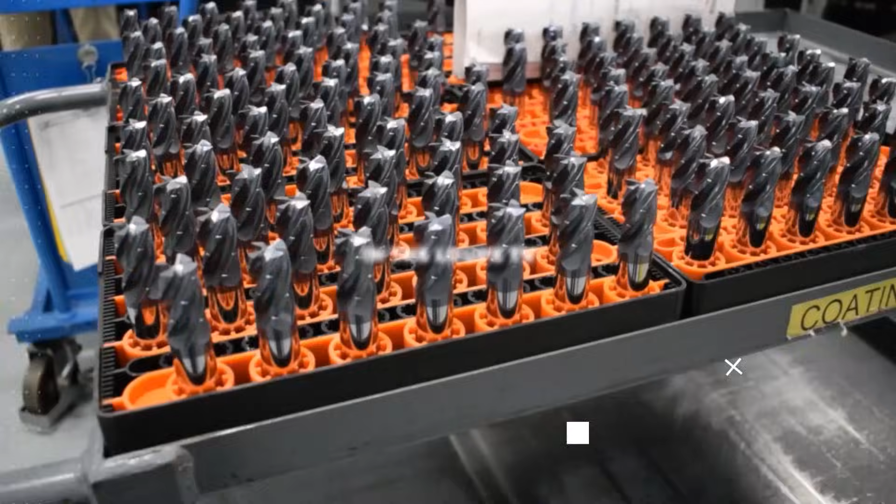Well, hey folks, we're talking about miniature cutting tools, small cutting tools. I mean, we should know, we're Harvey Performance. We make some of the smallest cutting tools in the industry. Actually, end mills down to 1 thou in diameter, plus or minus a thou on the tolerance, so if nothing showed up, you got what you ordered. That could go either way. I'm kidding. But that's how small these end mills and these drills are.

So when you start getting into miniature cutting tools, things are changing. The way we apply these tools is changing. The philosophy that we want to use in our application changes. That's what we want to talk about on this episode. We want to give some tips, we want to give some tricks, and we want to make sure you understand how to take that tool and use it without breaking it.

So you might think, what is a miniature cutting tool? Where does it start? Well, that varies. That's in the eye of the beholder, or the eye of the machinist, right? I personally look at anything that's under 1/8 of an inch, 100 thou, right around there, that's smaller, going all the way down to 1 thou in diameter as a miniature cutting tool. And this is where we need to start taking a look at this and machining it a little bit differently.

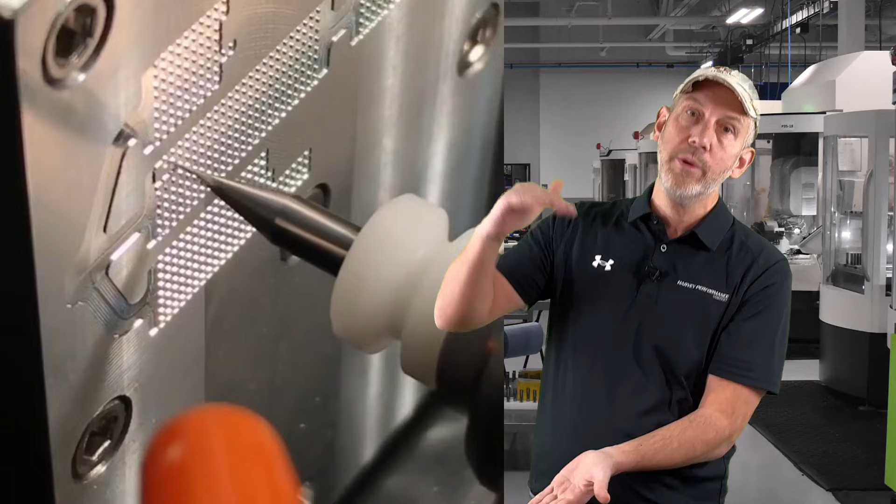Okay, folks, let's cut right away to get started with this. When you use a miniature end mill, or a miniature drill, or a miniature reamer, our main objective is what? The main objective is to get that tool not to break, right? Because we're going to waste a lot of tools to get to the point of when that tool fails. If we can get the tool to sustain right out of the gate, get it not to break, we can always come up with speeds and feeds. But our main objective is to get that tool not to break.

And so that's what this whole training is going to be on a little bit, is to understand why that tool breaks, why that tool fails, what are some of the things that are going to cause that thing to fail, and how do we combat that and fix that? So let's dive right into some of the things that cause these tools to break, and how do we fix them, and where should we start?

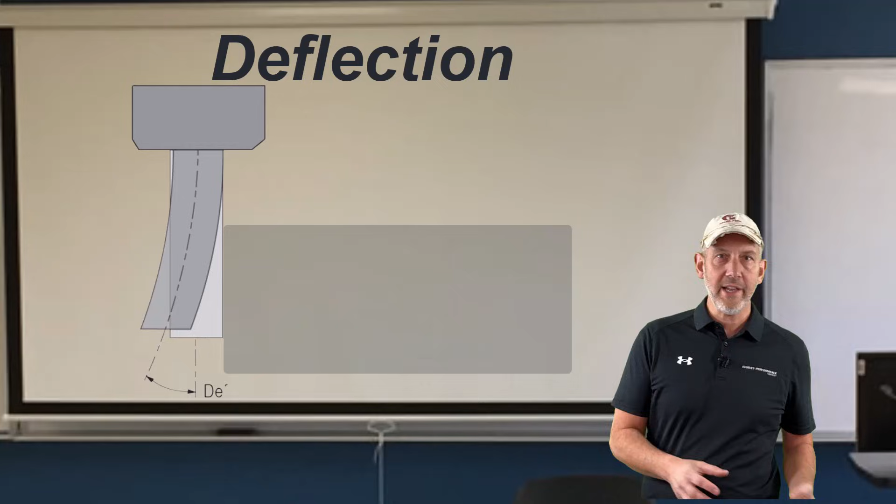Let's do it. So the number one problem with all cutting tools, the number one problem, and I'll say this over and over, is deflection. When a tool deflects, it vibrates, and carbide's very brittle, right? That's where we are going to break a tool. So deflection is the number one killer.

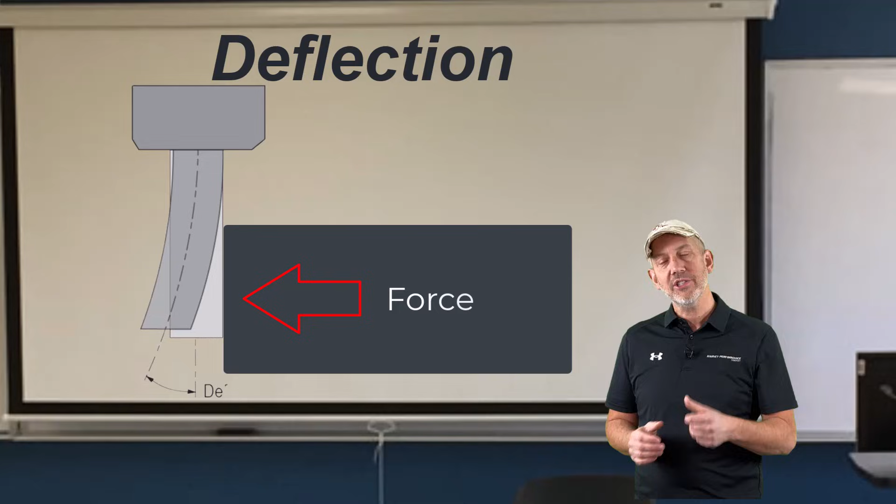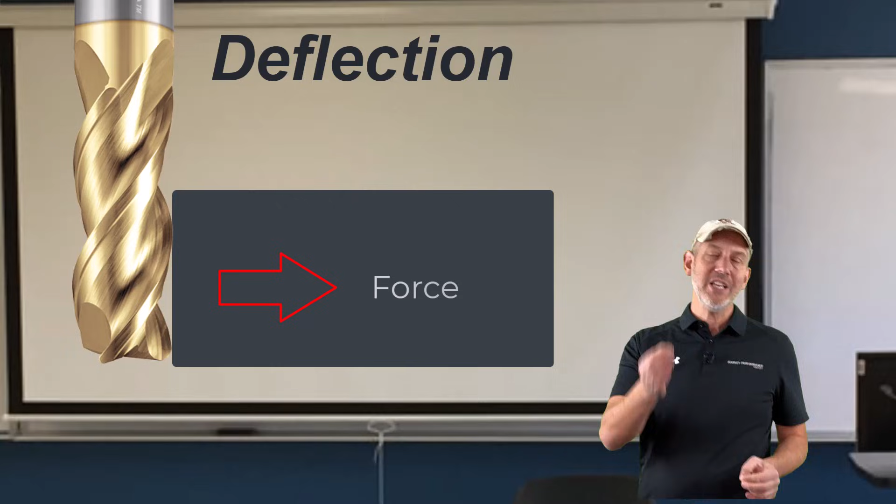So let's just talk about deflection really quick. Now, deflection doesn't mean as much on a 1/2 inch, 3/4 inch, 1 inch diameter tool. But again, we are talking about miniature cutting tools. So if we're getting down to miniature cutting tools, deflection is going to kill us. And there's something I want you to take away from this that's very important.

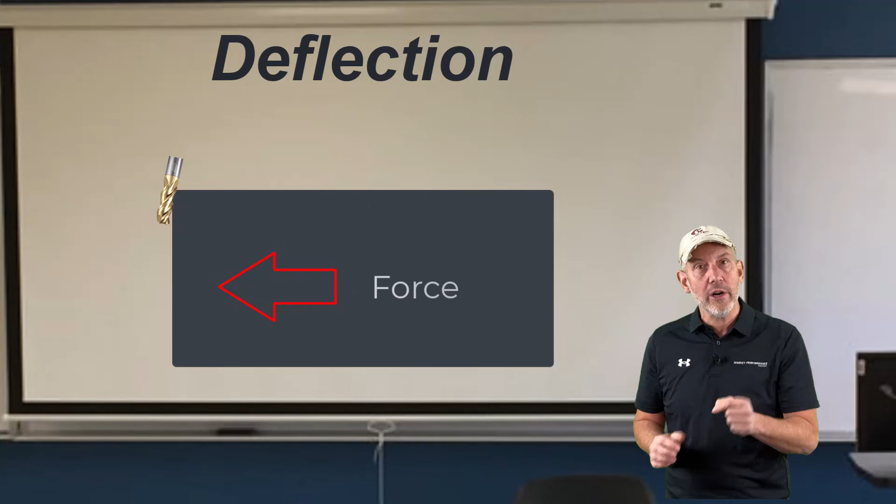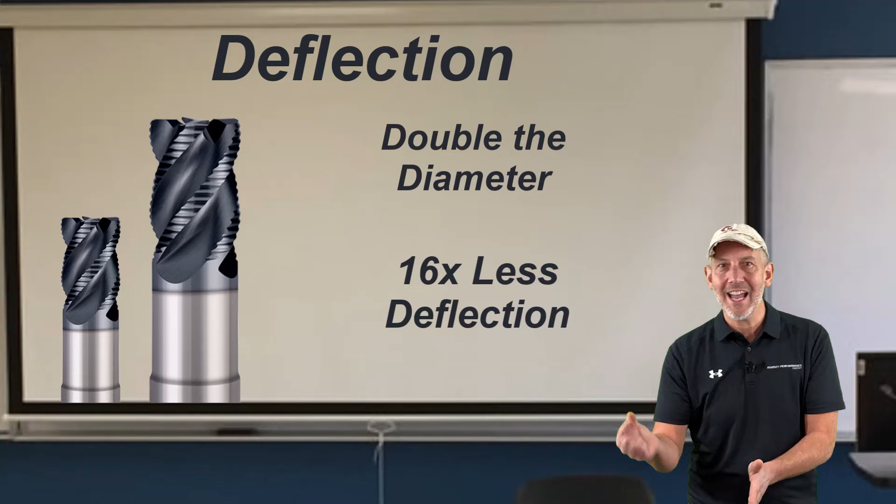If you just double the diameter of your cutting tool, it will result in 16 times less deflection. Think about that - double the diameter, 16 times less deflection. So if I go from a 0.0625 to a 0.125, I get 16 times less deflection on that cutting tool.

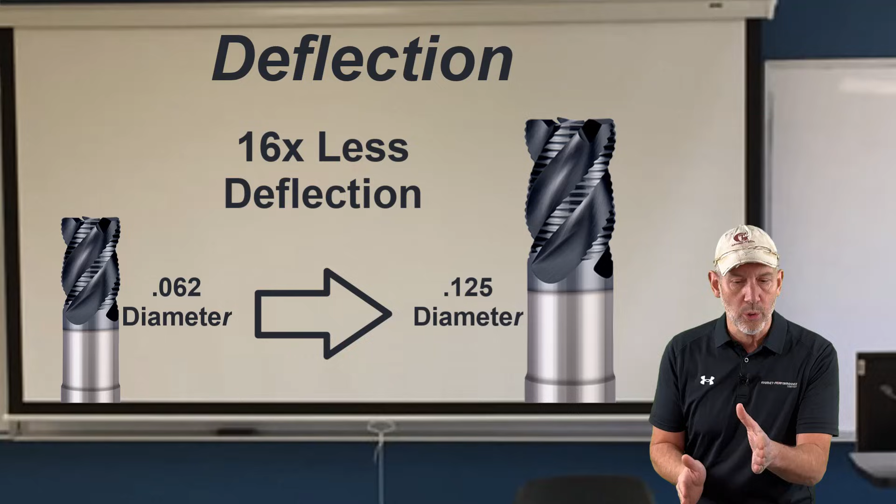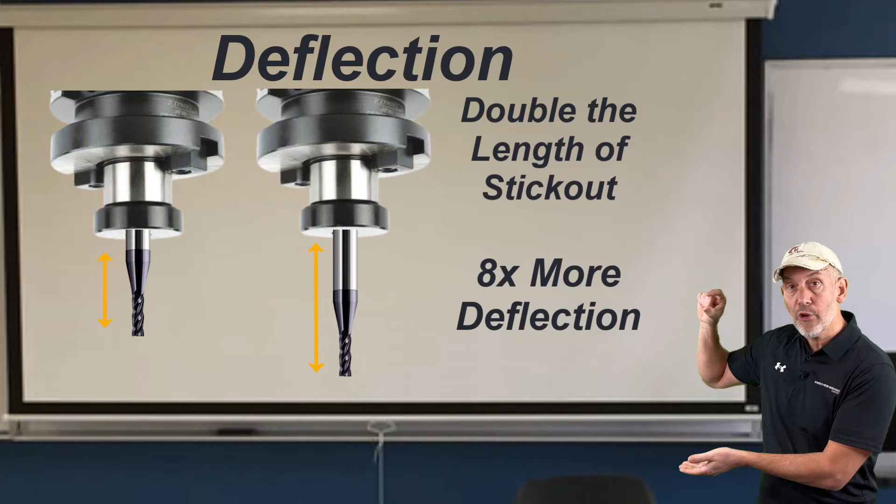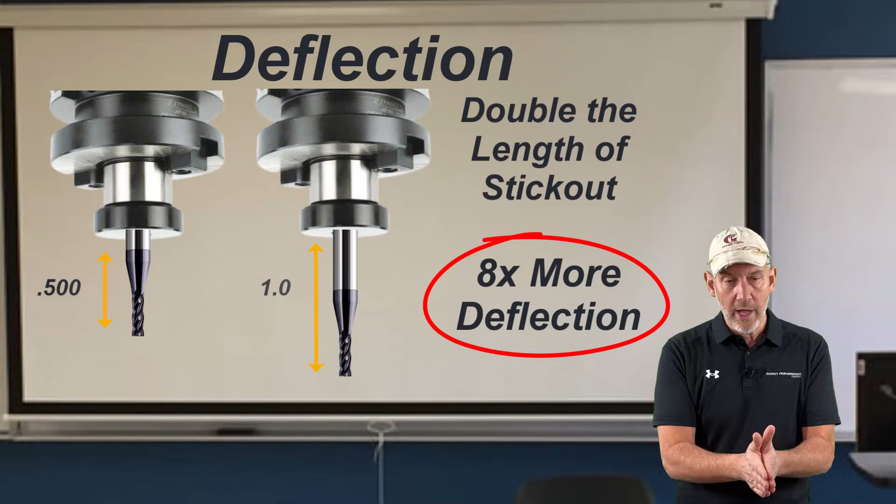If I double the length of the stick out, I get 8 times more deflection. So if I stick out double the length - let's say I'm sticking out a half inch, if I stick out a full inch, that gives you 8 times more deflection. So what am I saying? Diameter is key to the deflection. So if you can go up in size, you're going to reduce that deflection.

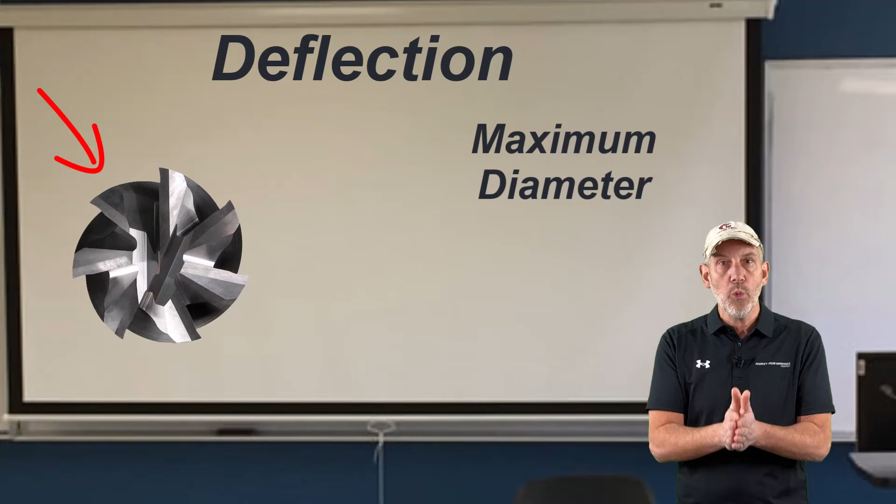Your stick out on the bottom of the tool is also going to give you the most amount of deflection. So what do we want to do? We want to go with maximum diameter. I know we're talking about micro tools, so don't worry about it, but we want to go with maximum diameter, so be mindful of that. And we also want to go with minimal stick out. Two of the main things we really want to focus on when we're talking about miniature cutting tools.

Okay, so we understand deflection's a killer, and we're going to dive into that a little bit later on what kind of geometry and stuff. But let's talk about another thing: surface foot. Surface foot is RPM, because surface foot is always contingent on the diameter. If you're not sure how to calculate RPM, it's based on the surface foot that we recommend. Surface foot is for the material you're cutting - it plasticizes the chip, anneals the chip, and makes it easy to remove.

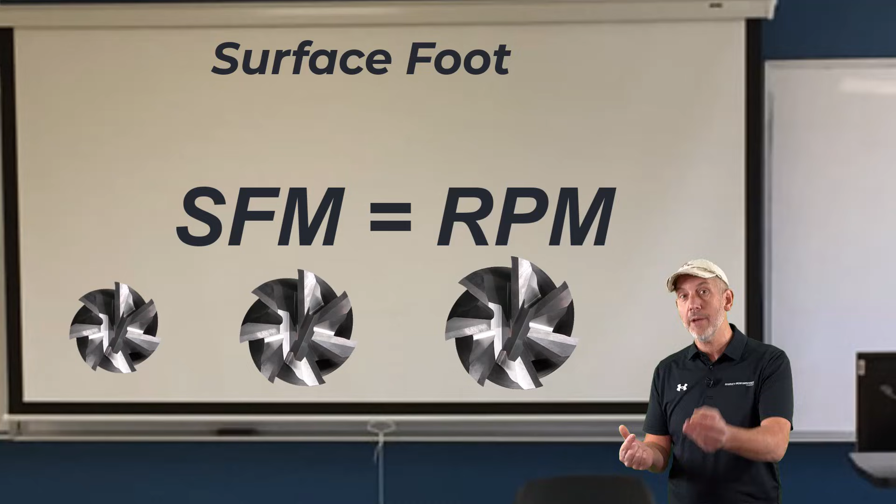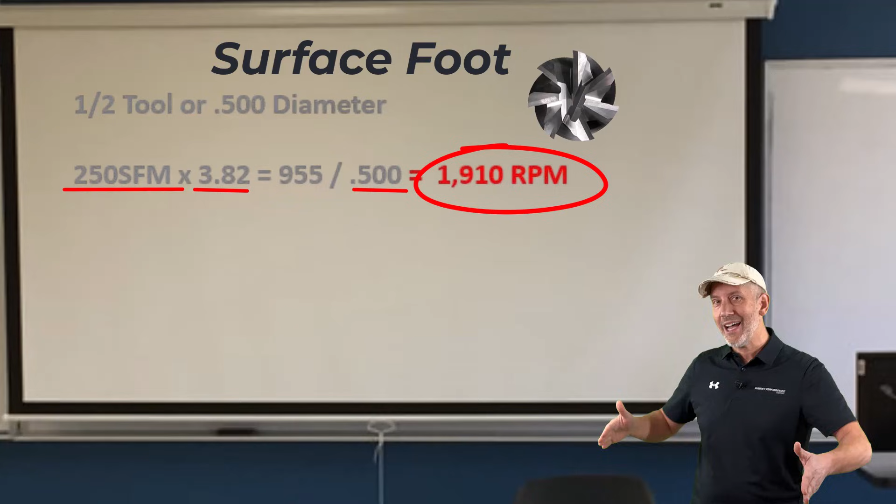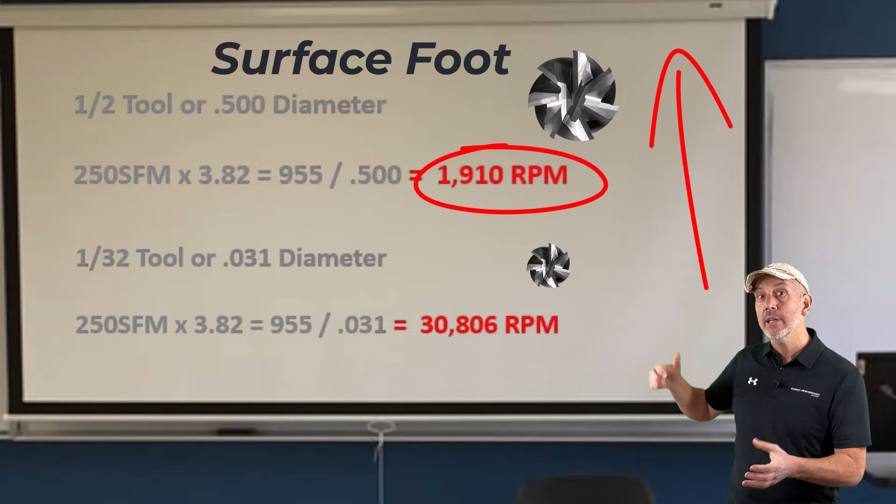Now, when you're running a half inch diameter tool at 250 surface foot, and you times it times 3.82 divided by that diameter, you get your RPM. Now, as the diameter gets smaller and you still need the same surface foot for the material, guess where your RPM goes? It goes up higher and higher.

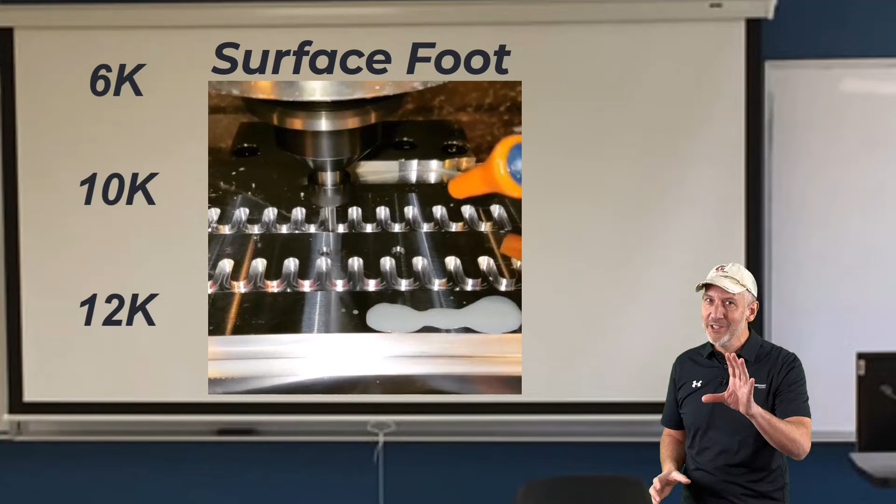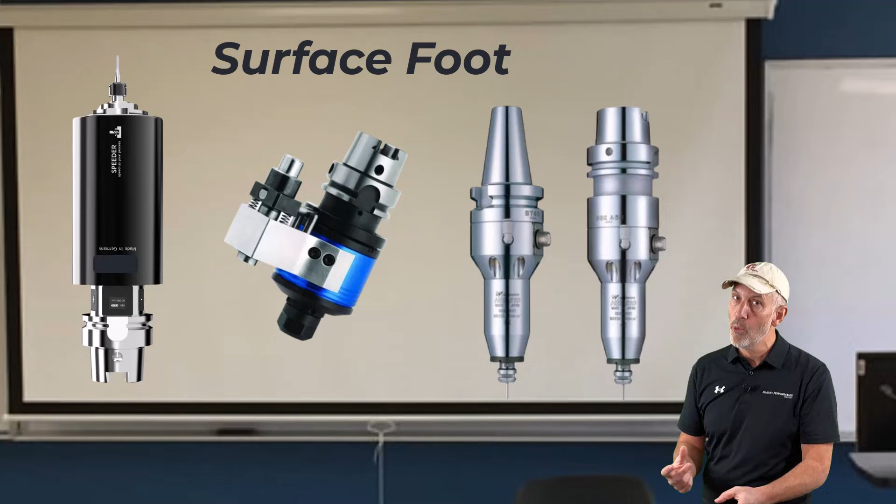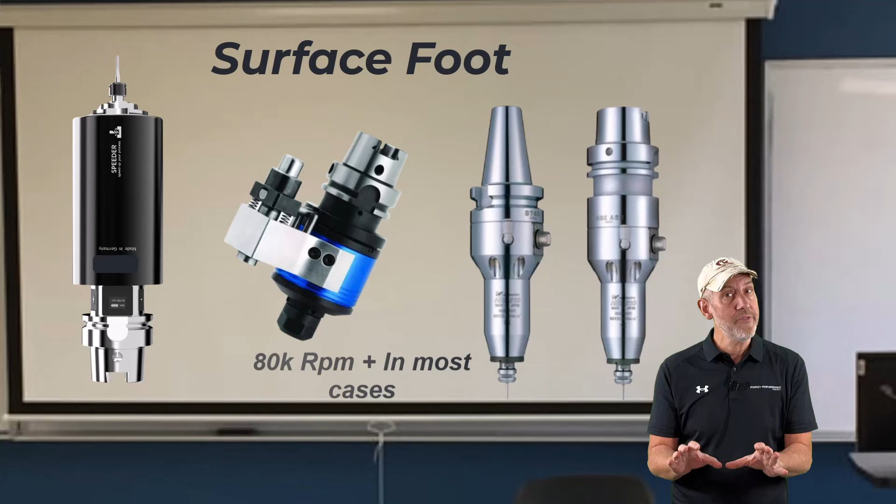It starts exceeding the maximum of your machine. Don't get worried - we can still run to the maximum RPM of your machine, but it's always good to consider some kind of high-speed spindle. Speeder heads - they have coolant driven, air driven, electric driven. Those are a little bit more power. There's different kinds of speeder heads that can bring the RPM up so you can plasticize the chip on a miniature end mill. This is just information. RPM does help sustain tool life when you're talking about miniature end mills, especially when your surface foot starts coming up, so be mindful of that.

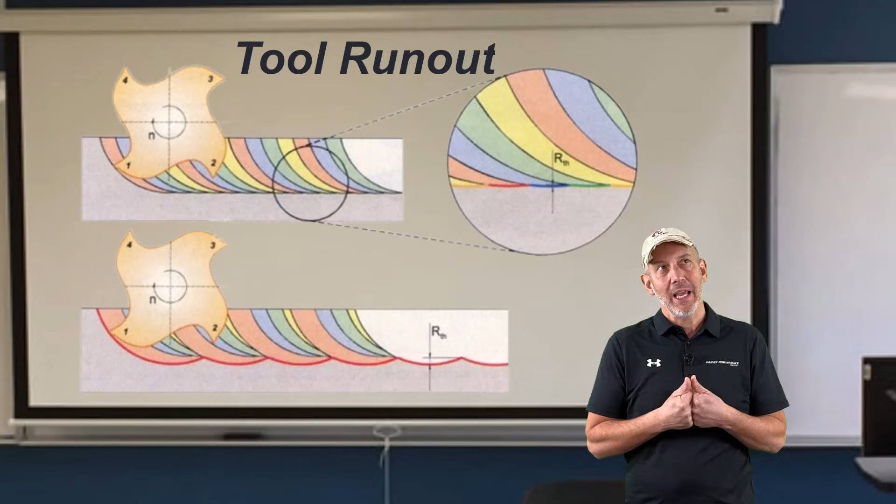Okay, let's talk about tool runout. Runout is where a tool in a spindle is actually wobbling and each cutting edge is taking a different chip load. Now I'm going to be the first guy to say that when you're running larger tools, if you have a little bit of runout - I don't want any runout, trust me, it's not good for any tool - but on a larger tool, when your chip load is larger for each tooth, if you have a little bit of runout, that's not going to cause that big of a problem.

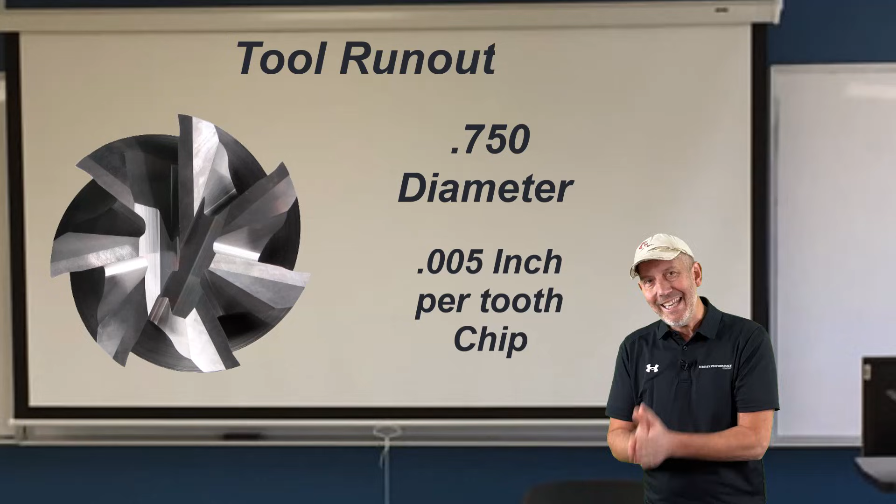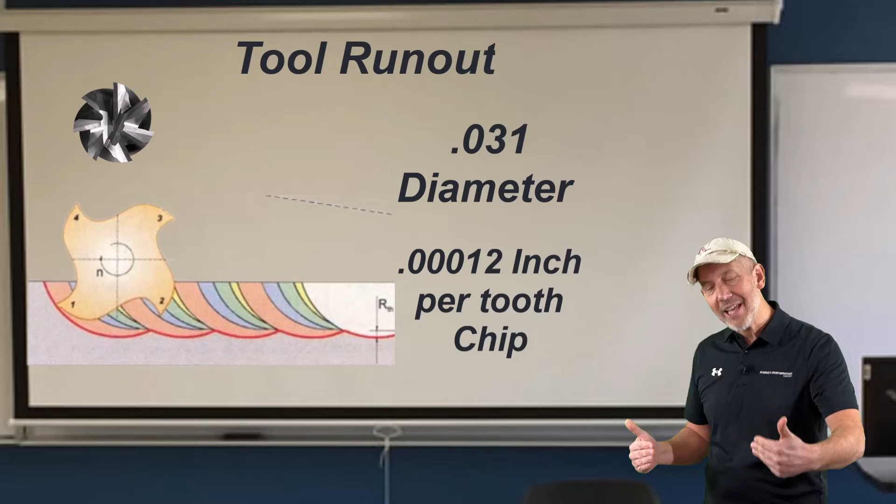It really isn't. Cutting tools are pretty strong, especially ours - they can handle a little bit of runout. Again, I don't want any runout. But if you take any type of runout and put that in a spindle with a miniature tool where you're starting to take tenths of a chip load or millionths of a chip load, very small, and you're exceeding the maximum runout of that chip load, that tool is just going to bounce. And if that tool is bouncing and deflecting, that tool is breaking. Bouncing, deflecting, breaking - that's it. That's how it's going to go on a miniature tool.

So if your runout is not sustainable for what you're doing for your miniature tool, and I'm going to tell you, tenths - there's great holders out there. People make great holders.

You can get that without having to do too much fussing and fighting. Runout is a killer on miniature end mills. So if you're having problems and you call a guy like myself or any of our technical personnel at Harvey Performance, we're going to check the runout right away, or ask you those questions, because we want to eliminate that factor before we run into it. Be mindful that runout on miniature tools is very important to get right down the middle. Take my advice on that one.

Okay, so let's get into a little bit of geometry. I like using this example when I talk about miniature tools because I've seen this come up in a lot of medical shops and other shops I go into, and we were able to solve some of these problems with a small end mill.

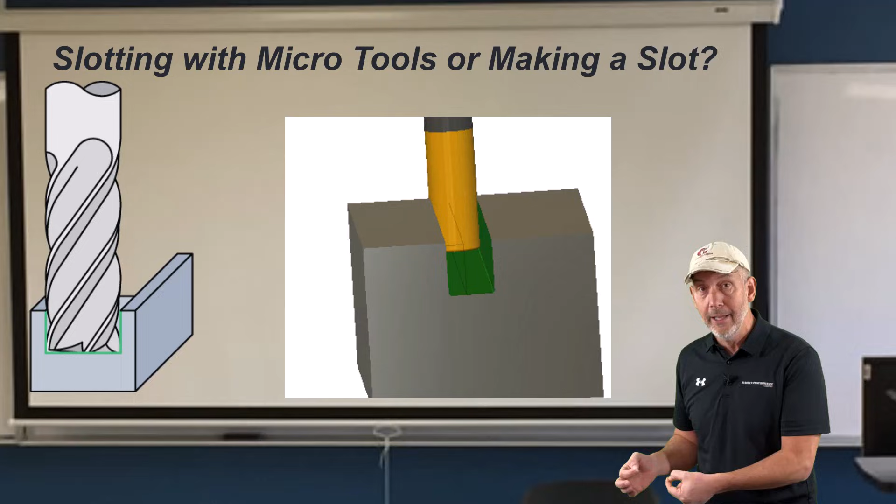Let's talk about slotting with a miniature end mill. When we slot traditionally with larger diameter tools, you can take a big chip load, a high axial depth, go very deep, and you want the fewest amount of flutes possible because the chips are large and need to be evacuated. So when slotting with a larger diameter tool, you want a low flute count. You've got to evacuate the chips—that's how you do it.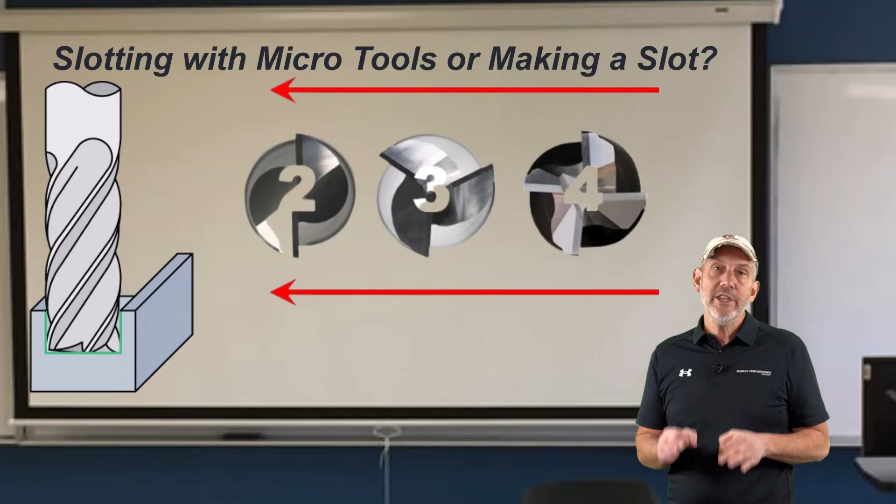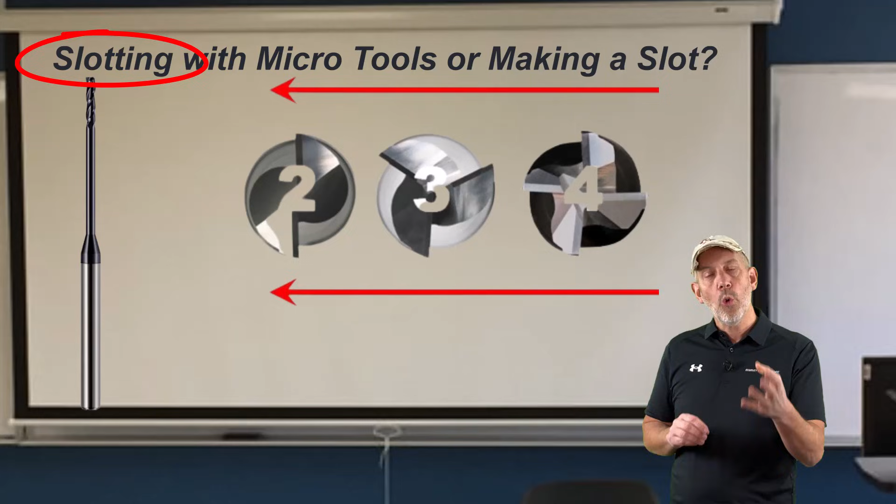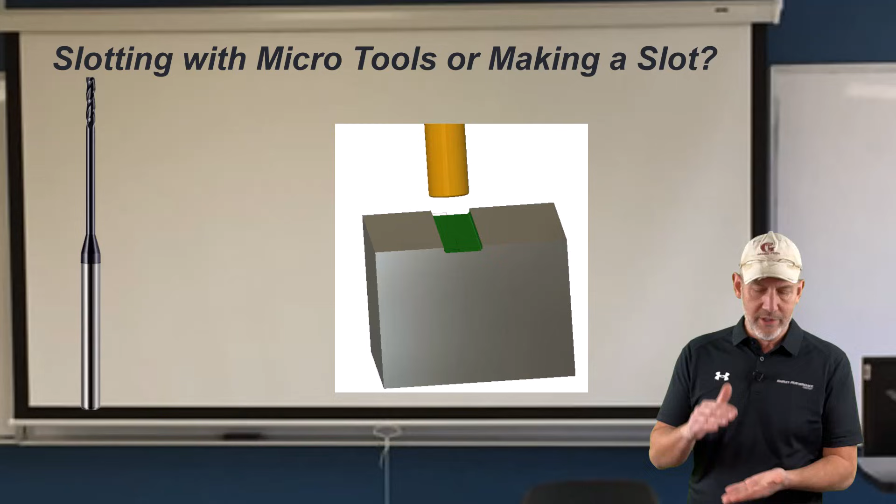When you're slotting with a miniature end mill, are you really slotting, or are you making a slot? With a miniature end mill, you're more making a slot, meaning your axial depths are very light—sometimes just a few thousandths, 3 or 4 thou, if you're running a 15 thou end mill. So chips are not really a problem.

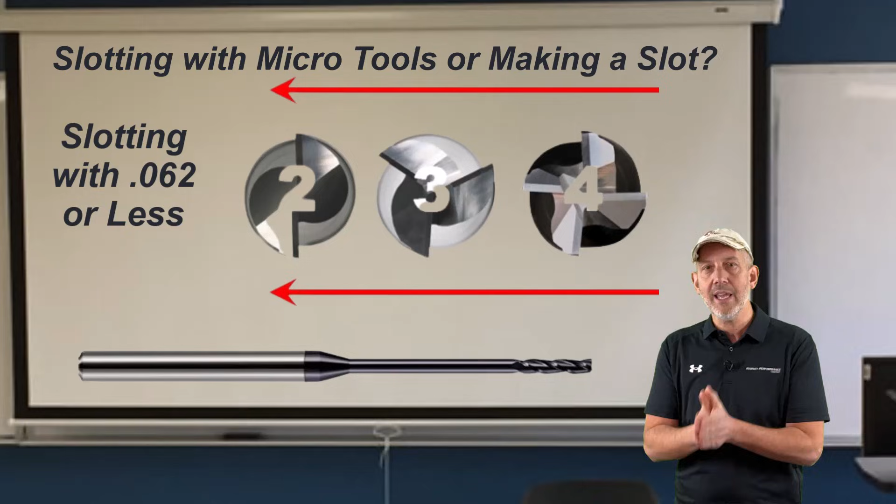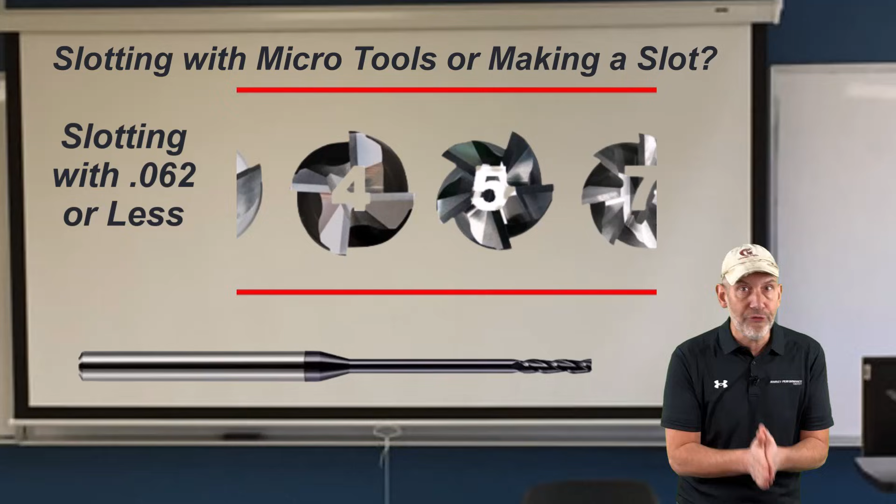Anytime we apply an end mill where chips aren't a problem, we want as many flutes in that end mill as possible. So if you're slotting with a miniature end mill, 0.062 or less, don't use the same principle as a large diameter tool—don't look for 3 or 4 flutes, or 2 flutes. Look for 5 or 6 flutes; you can still get away with slotting using more flutes. More flutes means a larger core, a larger core means less deflection, and less deflection means less breakage. That's the whole theme here. Put as many flutes as you can in your small miniature tools, and you'll be happy you did, because you'll get through that material a little easier.

Okay, before we wrap this up—and trust me, there's a lot more with miniature end mills, we'll recap a couple things—I want to talk about miniature drills really quick.

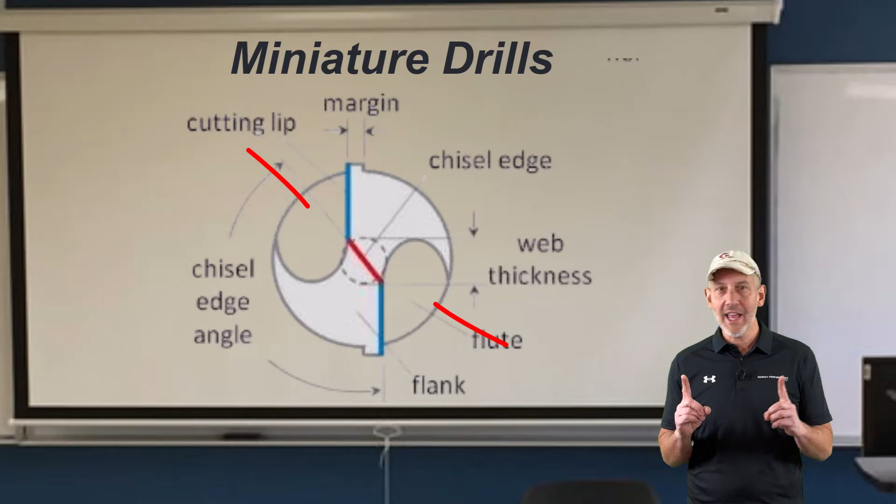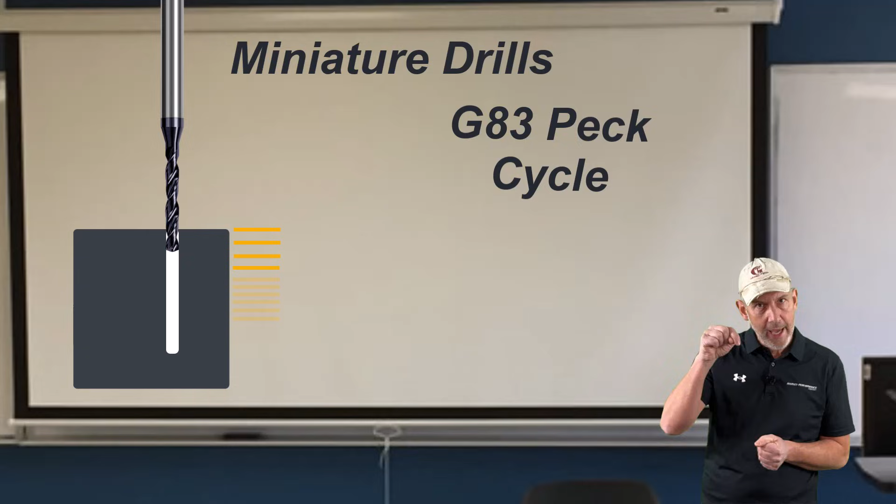Miniature drills—understand something with a miniature drill: there's not a lot of chip room. So don't be afraid to peck your miniature drills. In fact, the only way you're probably going to get through holes more than 4 or 5 times diameter, considered a deep hole with a miniature tool, is by pecking it. Take very light pecks, and as you get further down the hole, peck even more often. If you peck right out of the gate, you'll see a lot more success than if you try to go straight through with a miniature drill.

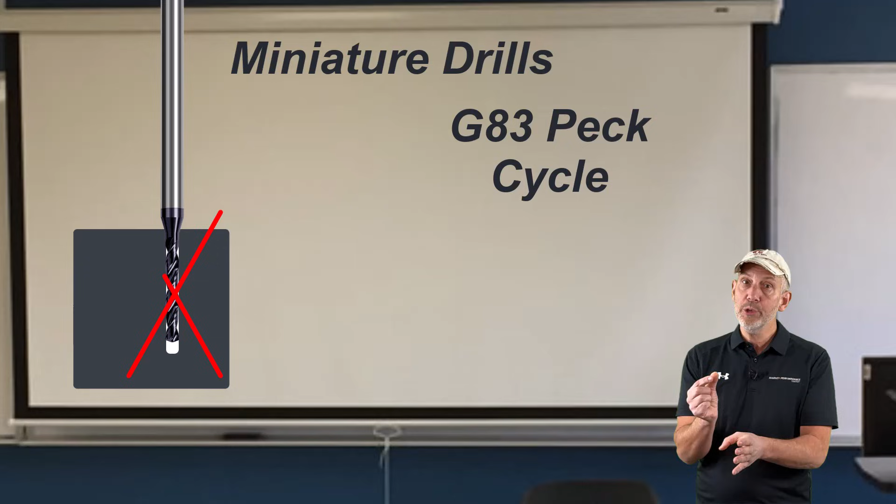Look at the flutes. When you get that drill, take a look at it and think to yourself: if I was a chip in this material, would I be able to fit in that flute? The answer is probably no. I know, I think about that all the time—I kind of put myself in those scenarios, but I'm a little off sometimes. If you just look at how large those flutes are on miniature drills—and we go down to 2 thou in diameter—you don't have a lot of room to hold the chips.

The more you can peck that miniature drill, the more you're going to be successful, and you're not going to break your tools, and you're going to save yourself a lot of money. Yes, it'll add a little bit of cycle time, but you're running pretty fast because you can max the RPM out and your feed's going pretty good. So trust me, when you're going with a miniature drill, peck that right out of the gate, and you won't break your tools, and you'll be successful.

Okay, normally I use this part of the section to recap, but we're not going to recap. We're just going to talk about a few things with miniature drills really quick, and then we're going to close this thing up. First, if you're using a miniature drill, the first thing you need to be mindful of is the minute you take that out of there, don't touch it, don't kick it, don't break it, don't touch it on anything. I've seen so many of these miniature tools get destroyed from the handling alone.

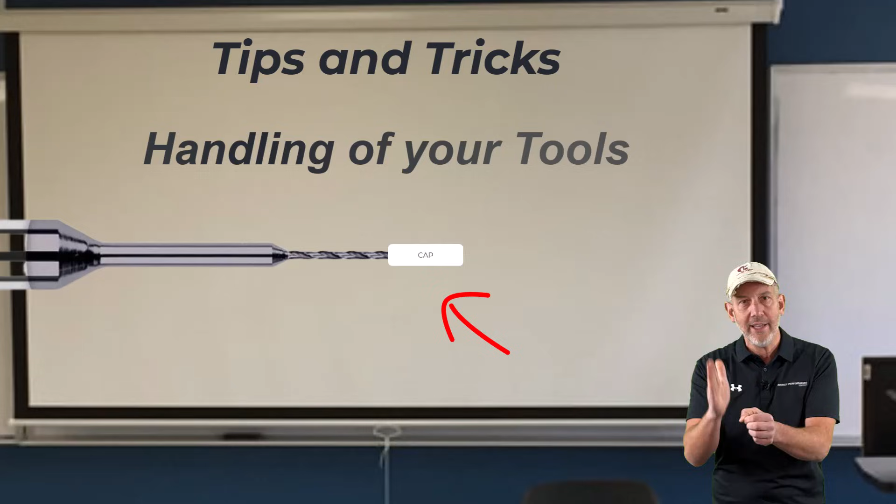Make sure your operators are well trained. Make sure they leave the cap on until they put it in the machine. Make sure when you're touching off on it, you don't hit the drill, the end mill, or anything like that, because it will break before you even get a chance to put it in the spindle. That's number one. Number two, touch off.

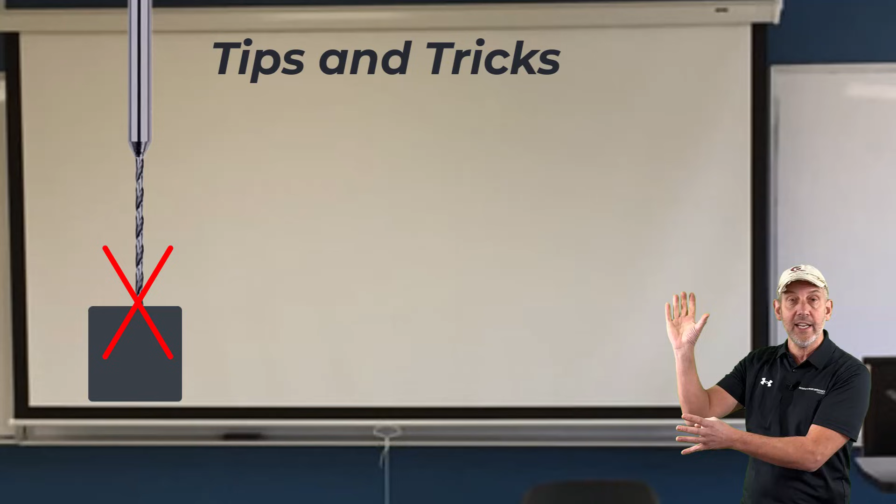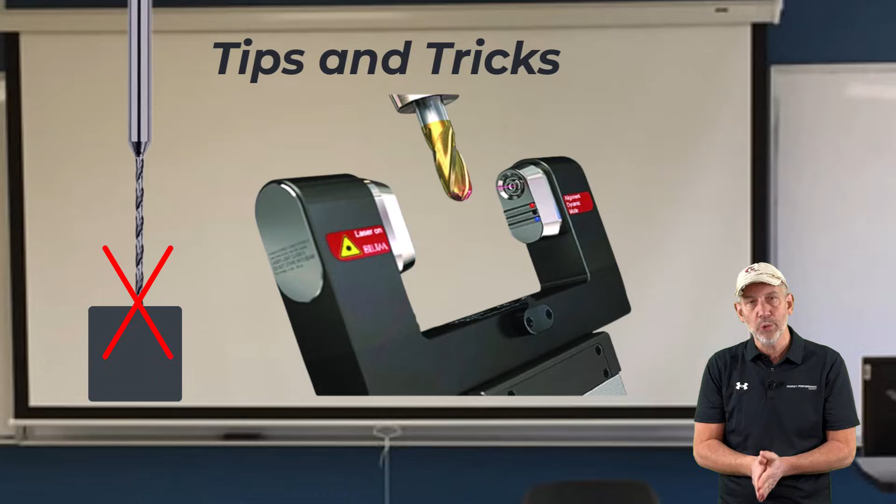If you can do non-contact touch off, where you check it in a shadow graph, or a Zoller, and measure that tool sticking out of your spindle, or maybe use a Blum laser system or something like that. Be very mindful that when you touch that off on a Renishaw or you actually hit the steel, it could break too. You don't want to do that. You want to be very mindful on how you're using these tools not to break them.

Geometry on these—don't be afraid to go variable. We have variable helix, variable pitch end mills. You're running these things very fast, and sometimes the symmetrical end mills will create a harmonic. Variable pitch is where we offset those flutes. We can do it on very small tools, very small tools. Can't do it on a drill—a drill has 2 flutes, how are you going to offset them 180 degrees apart? I'm talking about end mills. Get 3 or 4 flutes on an end mill, we make them variable pitch. It changes their harmonics, and they work very well.

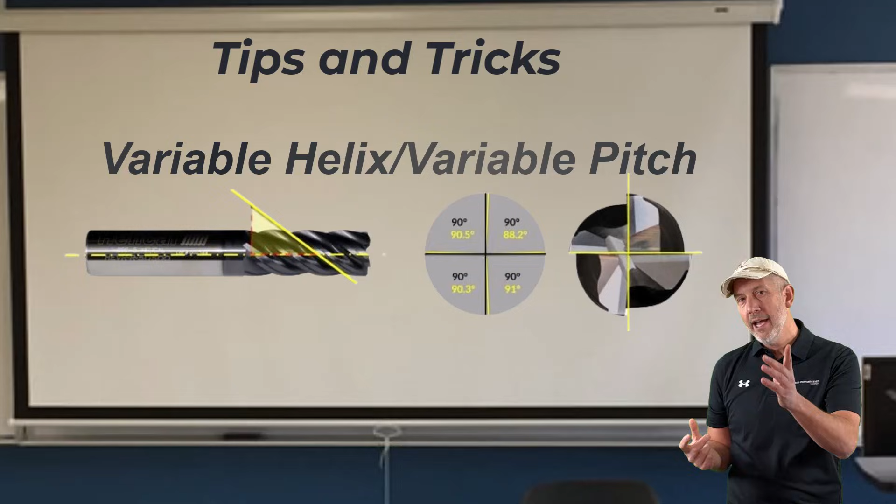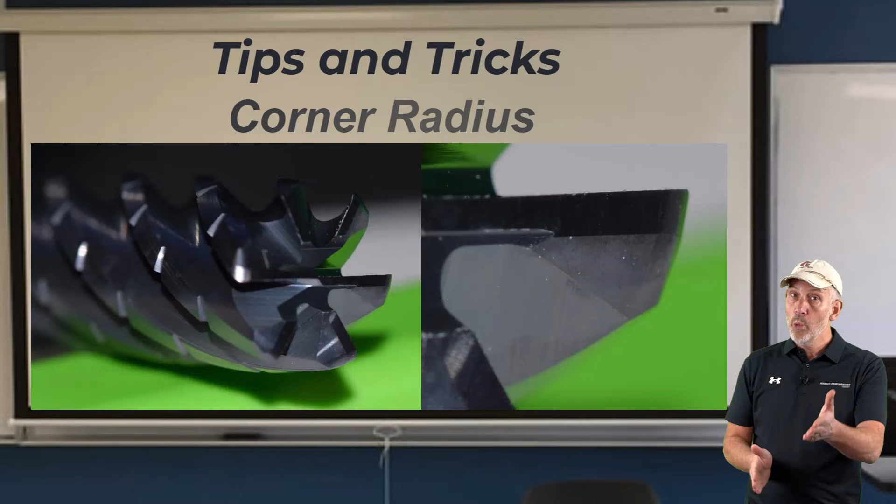Last thing, don't forget to put a corner radius on your cutting tools. A square corner is going to break down really quick. We want to make sure, even on the micro tools, we put a little corner radius on there—it makes it a little bit stronger. We have corner radiuses down to 5 thou on some of those smaller diameter tools. We might go a little bit smaller, not sure, I'd have to check in the catalog. I'll get back to you. But those are some of the tips and tricks you want to use with micro tools.

There's a lot of information here. Please, if you have any questions, we're available—call us, call somebody at Harvey Tool. The folks that make the miniature cutting tools have been doing it for many years. We're very good at it, we're very good at applying these tools. We can help you here so you don't break these out of the gate and you're successful.